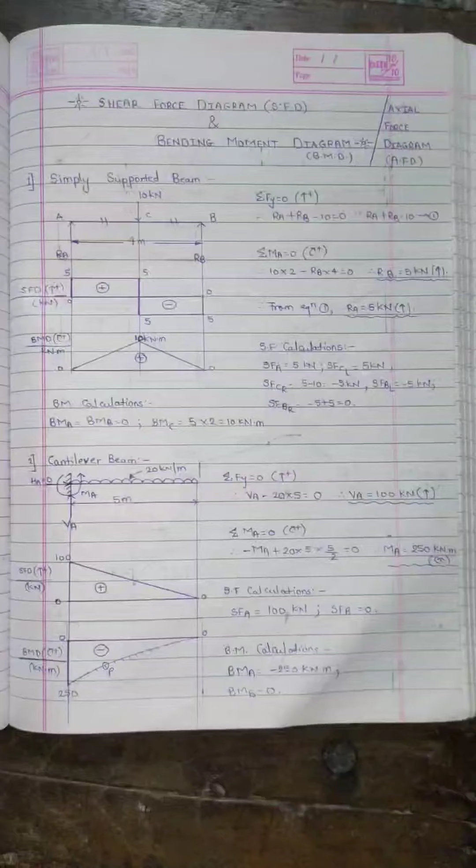In this video we are going to learn about SFD, BMD and AFD, that is shear force diagram, bending moment diagram and axial force diagram. This topic is important for engineering students of branches like civil, mechanical, automobile and related branches, and also for other branches in the first year of engineering.

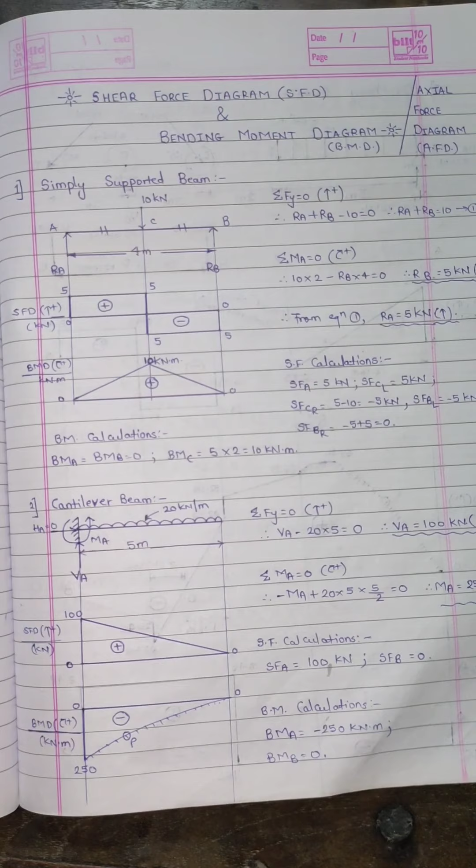This topic starts with dividing it into different types of beams. First is simply supported beam. I have taken a beam of 4 meter span, and at the center exactly 10 kilonewton load downwards is concentrated. This is exactly at the center, so I have mentioned symmetry over here.

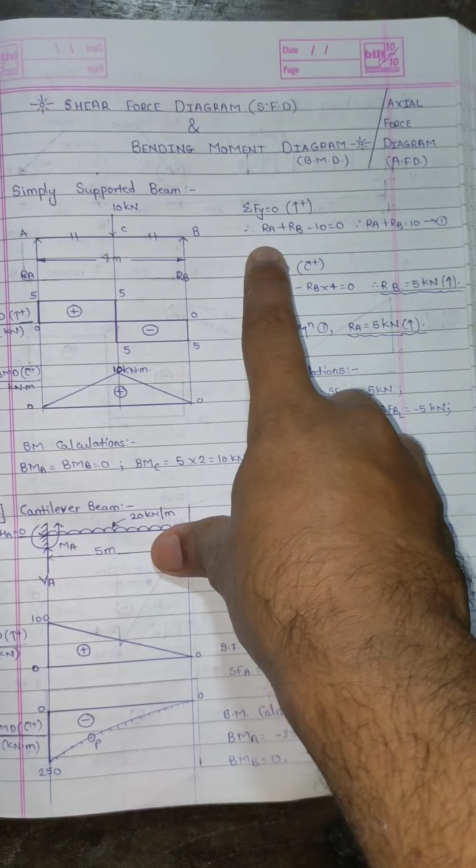Now this point is A and this point is B. First of all we will calculate support reactions, so summation Fy equal to 0. How to calculate support reactions we have also explained in one of our videos, so I'll give that link also, you can go through that.

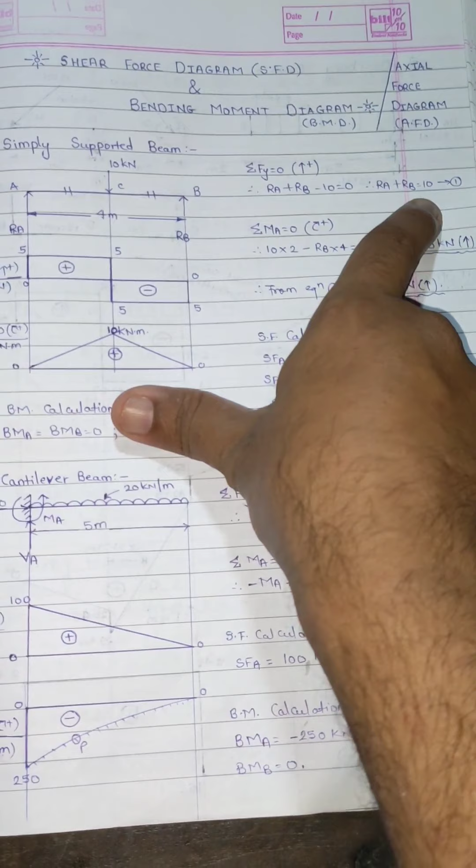Summation Fy equal to 0: Ra upward so positive, Rb upward so positive, and this 10 kilonewton load is downward so we take minus 10. So we get an equation as Ra plus Rb equals to 10, equation number 1.

Now we take our next equilibrium condition, that is summation moment at A equal to 0. This 10 going clockwise, we are taking clockwise positive - one may take clockwise negative and anti-clockwise positive also, but here I am taking convention as clockwise positive.

So summation moment at A equal to 0: 10 going clockwise so positive, and the distance 4 divided by 2, that is 2 meters, so 10 into 2, then this Rb is going anti-clockwise so minus Rb into the distance 4 meters. So I get the answer of Rb as 5 kilonewton. If I put this value in equation number 1, I get value of Ra as 5 kilonewton.

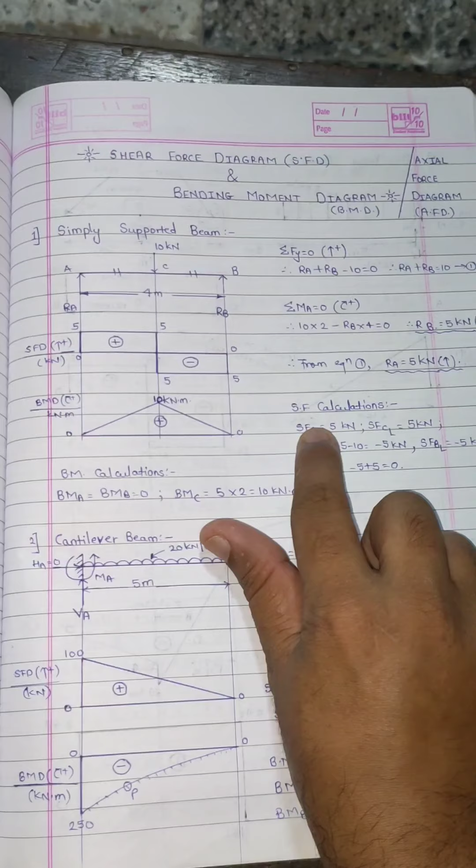Now we have to do shear force calculations. The shear force at A is nothing but Ra, which we received as 5, so I'll draw this vertical line for my shear force diagram. For shear force diagram, going from left to right, we take upward positive, and units are kilonewton since forces are given in kilonewton. So it is 5 over here.

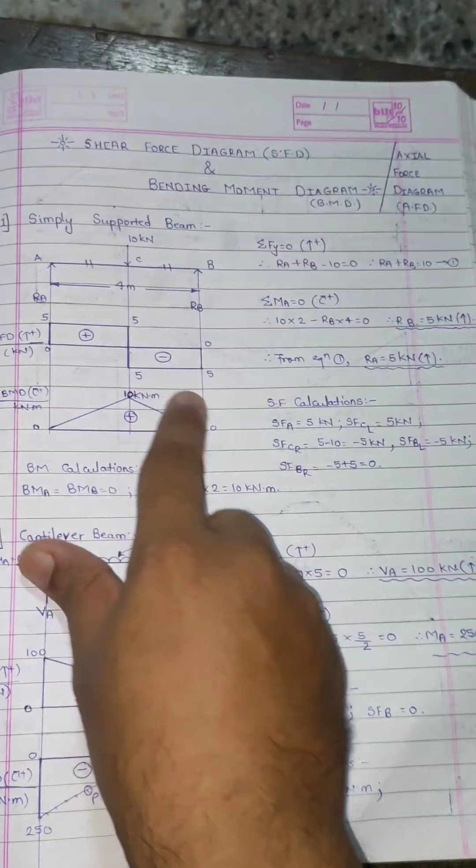Now in between from A, before reaching point C, there is no load, so it is a straight line. As soon as I reach point C, I get this downward load of 10 kilonewton. So shear force at C left is 5 kilonewton, and 5 minus this downward load, that is 10, equals minus 5, so you go down to minus 5.

Now between C, before reaching point B, there is no load, so you draw a straight line at minus 5, and as soon as we reach point B, we get this Rb upward load of 5, so minus 5 plus 5 gives answer as 0. So this is nothing but our shear force diagram.

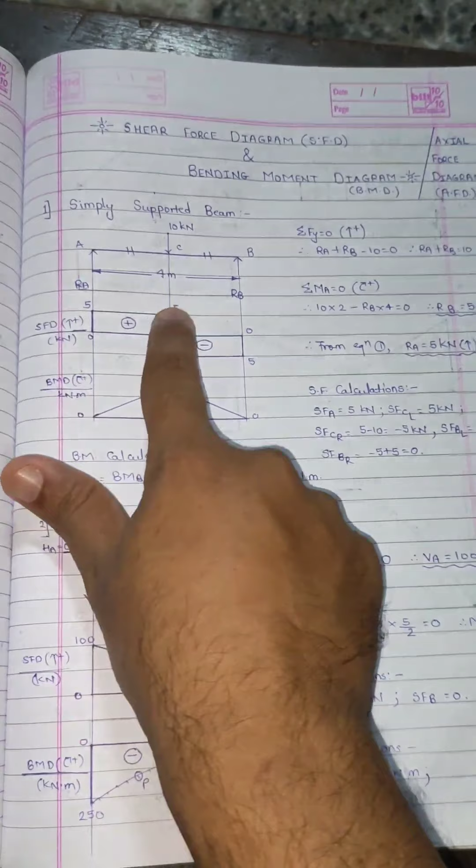Now to draw the bending moment diagram, we have to first do bending moment calculations. Always remember, if it is a simply supported beam, one end hinged and other end roller support, the moments at the ends will always be 0. So bending moment at A equals bending moment at B equals 0, so you draw 0, 0 over here.

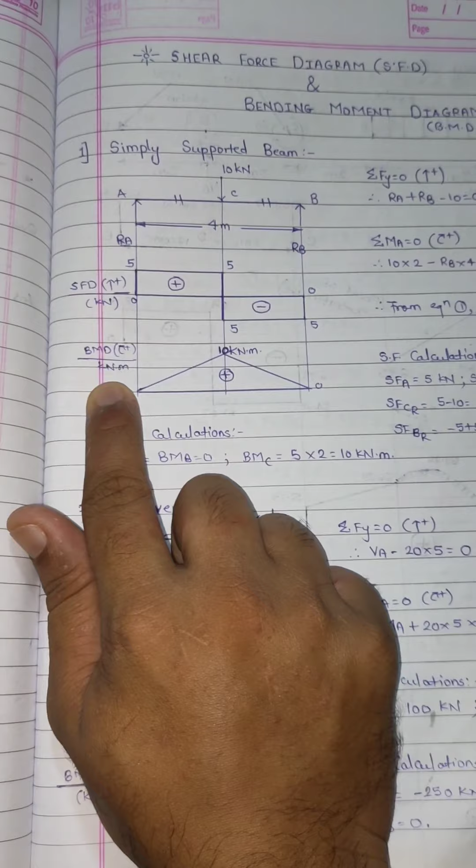Then to find bending moment at C, either I can see from this side or from this side. Whenever I draw my bending moment diagram, I mention clockwise positive, and the unit of moment is kilonewton meters. This force Ra is going clockwise so positive, that is 5 into the distance 2, so 5 into 2, that is 10 kilonewton meter. So I draw an inclined line and connect it here.

So this is what about SFD and BMD of a simply supported beam.

Now, second type of beam we are taking is cantilever beam. I have taken this cantilever beam of span 5 meters, and obviously being cantilever, one end will be fixed, other end will be free. Here I have taken a UDL, that is uniformly distributed load, of 20 kilonewton per meter.

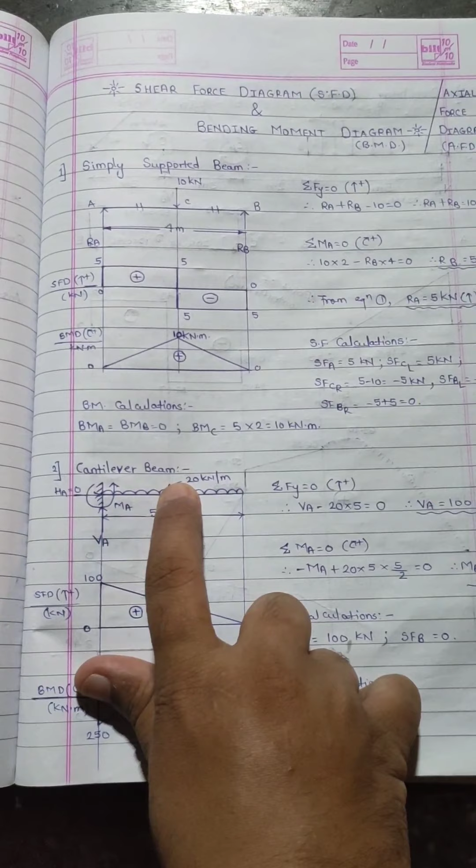Now this point is A and another point we let's say B. At point A, as it is a fixed support, we have to take one unknown moment MA, then unknown shear force vertical VA, and horizontal force HA. But obviously as there is no horizontal load, HA value will be 0.

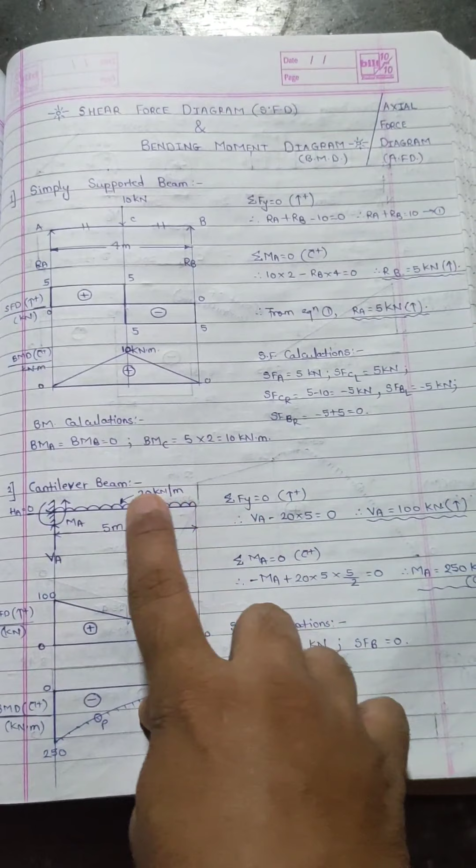Now first of all we will calculate the support reactions, that is summation Fy equal to 0. We take VA upward positive, so plus VA minus 20 (UDL length is 5, intensity is 20), so minus 20 into 5 equal to 0. So we get VA equals to 100 kilonewton, upward arrow.

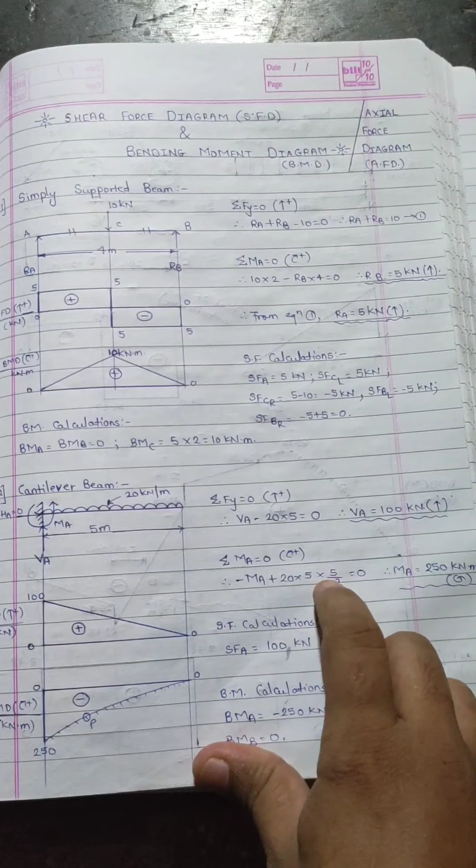Now when we calculate summation moment at A equal to 0, clockwise positive, MA is anti-clockwise, so minus MA, plus 20 into 5 into 5 by 2. This UDL is 20, intensity is 20, so 20 into 5 (length) into length upon 2 -- the concept we explained in our second last video. So into 5 by 2 equal to 0, and the value we get for MA is 250 kilonewton meters, and since it's positive, our assumed direction, anti-clockwise, is correct. So MA is anti-clockwise 250 kilonewton meter.

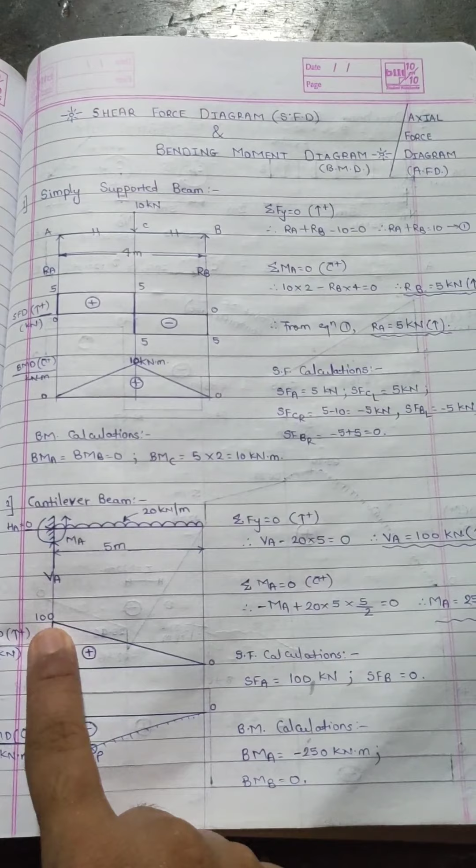Now to draw shear force diagram, first we have to do shear force calculations. Remember, for a cantilever beam at the end support, the shear force will be 0, and when we reach over here, the value of shear force at A is nothing but 100 kilonewton. You have to draw this triangle in the shear force diagram, with upward force positive and unit kilonewton.

Now to draw bending moment diagram, we have to do bending moment calculations first. Remember, at the end of a cantilever beam, moment will always be 0. So bending moment at B we take as 0, and at A we have moment MA, that is bending moment at A, which is 250, but since it's anti-clockwise and we take clockwise positive, the diagram will go downward.

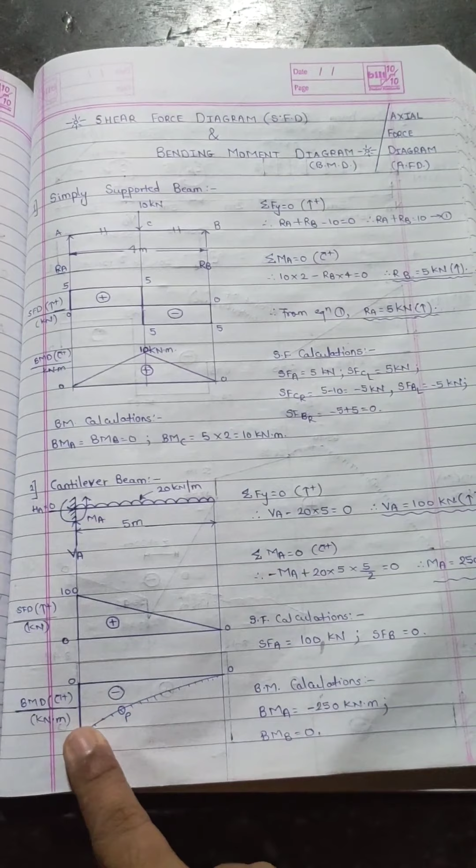Remember, for a bending moment diagram, if there is a UDL, you have to draw the curvature as parabolic in nature. My style of drawing this parabolic shape is to draw a simple curve, draw these lines, and denote P. Some books will just draw a curve and indicate by a line, writing 'parabolic' or 'parabolic curve' or 'parabolic shape'. I just draw these lines and mention P, so the examiner understands this is a parabolic curvature. Okay, now this is all about cantilever beam.

Now our next type of beam is overhang beam.

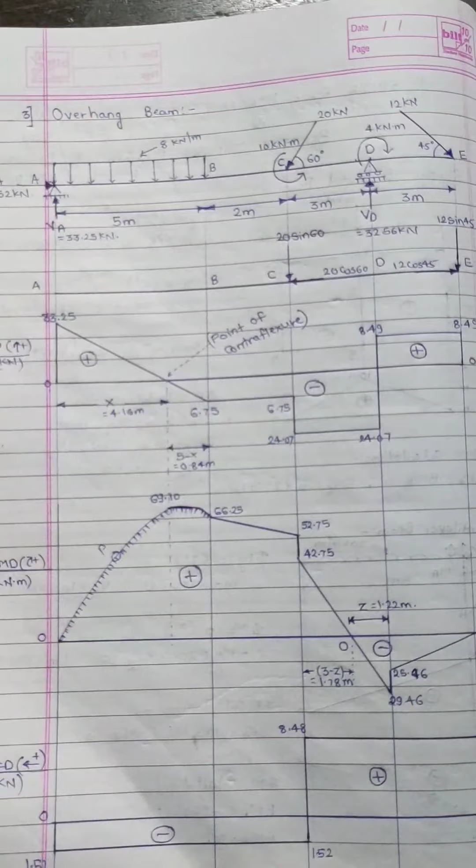I have taken this overhang beam wherein from A to B the length is 5 meters, and I have taken a UDL -- this is also a style of showing UDL -- of 8 kilonewton per meter. Then from B to C there is no load and the length is 2 meters.

At point C we have an anti-clockwise moment of 10 kilonewton meters. Also we have an inclined load, inclined at 60 degrees to the horizontal, of 20 kilonewton. Then from C to D there is no load, but the length is 3 meters.

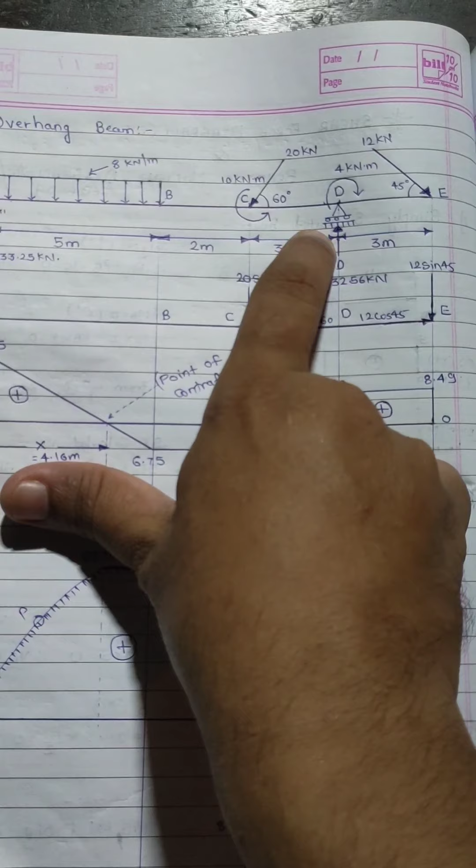At point D there is a roller support, and also a moment in the clockwise direction, intensity 4 kilonewton meters. Then at point E, this is the overhang, the hanging part of the beam. At this point, at 45 degrees to the horizontal, we have a load of 12 kilonewton. So this overall beam length is 5 plus 2 is 7, plus 3 is 10, plus 3 is 13 meters.

So obviously we will have the unknowns as VA, and there will also be HA, because there is an inclined force too. So this is VA, HA unknown -- later on we will find it out -- and also we have VD. So let's start with the calculations. To do calculations, first of all, I'll just put my mobile like this.

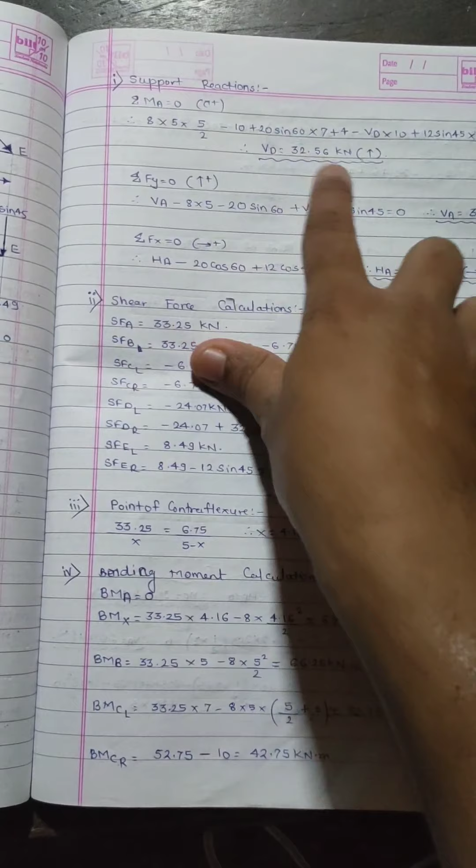Okay, so what we will do, we'll first take summation moment at A equal to zero. We have this UDL, intensity 8 kilonewton per meter, so 8 into the length is 5 into 5 by 2, that's what we have written.

Then this moment of 10 kilonewton meters going anti-clockwise, so we'll write minus 10. Then this inclined load, we have resolved as vertical 20 sine 60 and horizontal 20 cos 60. Also this load again, 12 vertical sine 45 and horizontal 12 cos 45.

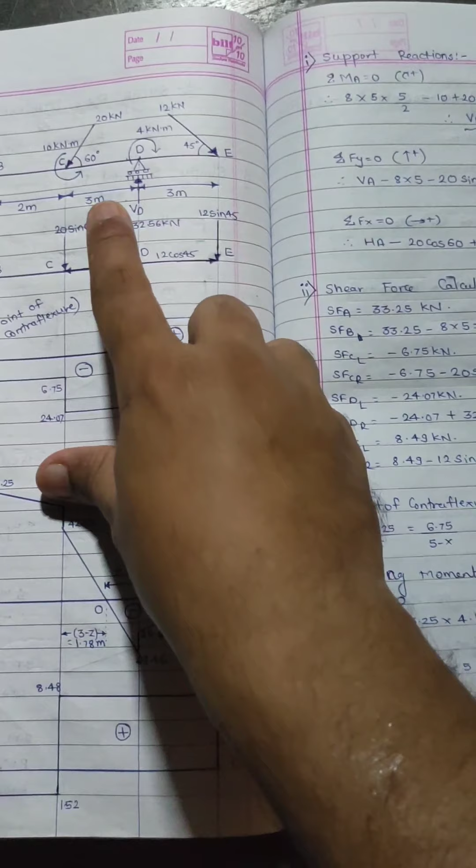So this vertical will be 20 sine 60, and since it's going clockwise, it's positive, and the length is 5 plus 2, that is 7 meters. So 20 sine 60 into 7, that is what we have. Then the next is this clockwise moment, 4 kilonewton meter, and for a moment there's no need of writing length, so plus 4 as it is going clockwise.

Then this VD going anti-clockwise, so minus VD into the length, 5 plus 2, 7 plus 3, 10. So minus VD into 10, plus this 12 sine 45 again going clockwise, total length 13 meters, so plus 12 sine 45 into 13 equals to zero.

From this equation we will get VD equals to 32.56 kilonewton.

Next is summation Fy equal to zero. We have to take upward positive, mentioning all vertical loads. First VA, since it is upward, so plus VA. Then we have this downward UDL, minus 8 into 5. Then we have this 20 sine 60, minus, since it is downward. Then this VD upward, so plus VD.

Then this 12 sine 45 is downward, so minus 12 sine 45. There is no other load present, so no moment to take in vertical loads. So VA we will get as 33.25 kilonewton.

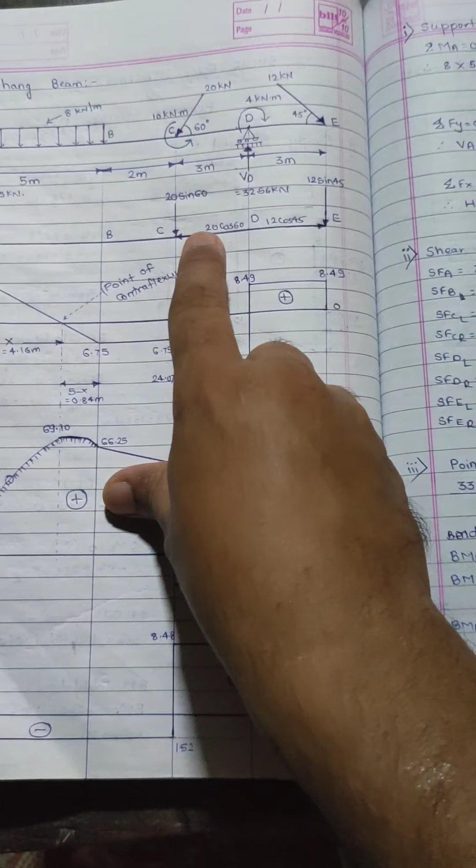Upward arrow. Then to find Fx, there is a horizontal load present at support A because there are two inclined loads. The notation we are taking is right positive. HA already assumed as right, so plus HA. Then this is going left side, minus 20 cos 60, and this is going right, plus 12 cos 45. When we do calculations, you will get HA equals to 1.52 kilonewton.

Now first we have to do shear force calculations, so draw shear force diagram. We have mentioned, going left to right you take upward positive and downward negative. If going right to left, it is exactly vice versa, upward negative and downward positive, but normally we will follow this convention.

First let's see the shear force at A. This is nothing but VA, that is 33.25, so we draw a straight line of 33.25. From A to B there is a UDL, so this line will be inclined, and the value we calculate as 33.25 minus 8 into 5, since it's UDL, giving minus 6.75, and since it's minus, we draw it downwards.

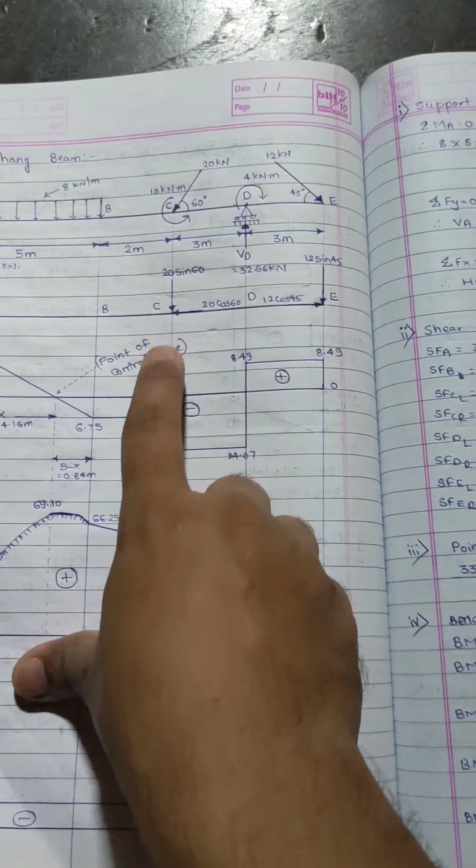Now from B to C there is no load, so we just draw a straight line. As soon as we reach point C, there is a downward load of 20 sine 60. So C left, same load you copy, and at C there is no load until you reach the point, so at point C right, minus 20 sine 60, you'll get answer as minus 24.07.

Now from C to D there is no load, so we draw a straight line, that is D left. As soon as you reach point D, there is a vertical load, VD, whatever the value of VD, that we have to add or subtract.

So minus 24.07, it is at D left point, and at D right point the value of VD we will add, and we will get D right shear force. Then again at E left, same value, that is 8.49 what we have received. We will just draw a straight line as there is no load in between, and as soon as we reach this point, we will subtract, not add, because it is downward. That is 12 sin 45, and we will get answer equal to 0.

Now when you draw this shear force diagram, you see there is a change from positive to negative, there is a change in curvature of the shear force diagram. This point is called the point of contraflexion, or point of inflection, or point of zero shear. Many times the bending moment over here will be maximum, except in some cases.

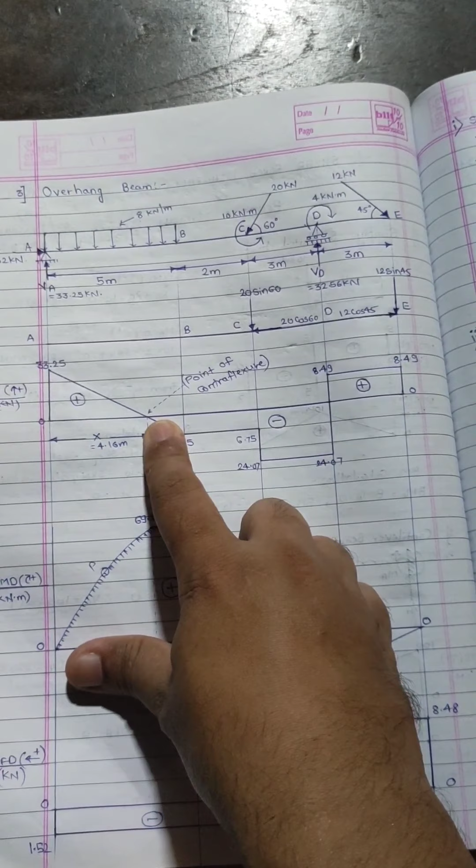So we have to first find out this distance x. To find out this distance x, we have to use the similarity of triangle properties which one studies in school life, that is height upon base equal to height upon base. So height of first triangle is 33.25, and let's assume this length as x. So 33.25 upon x equal to, this height is 6.75, so 6.75 upon, if total is 5 and this is x, obviously this will be 5 minus x, so upon 5 minus x, and we will get answer x is equal to 4.16, which we can solve on a calculator.

Now we have to draw a bending moment diagram. To do this, first we have to do bending moment calculations. At A and E, both points, the moment will be 0.

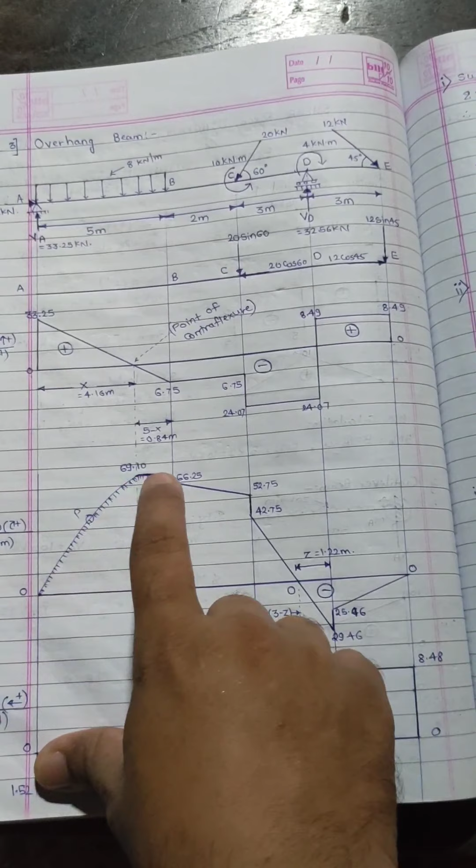Now from here to here, at that point x, at moment A, bending moment at A equal to 0, then at x what is the value? So this 33.25, that is VA, into the distance. What is the distance? We have found out 4.16. We are finding at this point, so 4.16. Then is there any other load? Yes, there is a UDL, that is 8. So minus 8 into 4.16 square upon 2, the formula here is WL square by 2, because it is a UDL. So we will get value as 69.1 kilonewton meters.

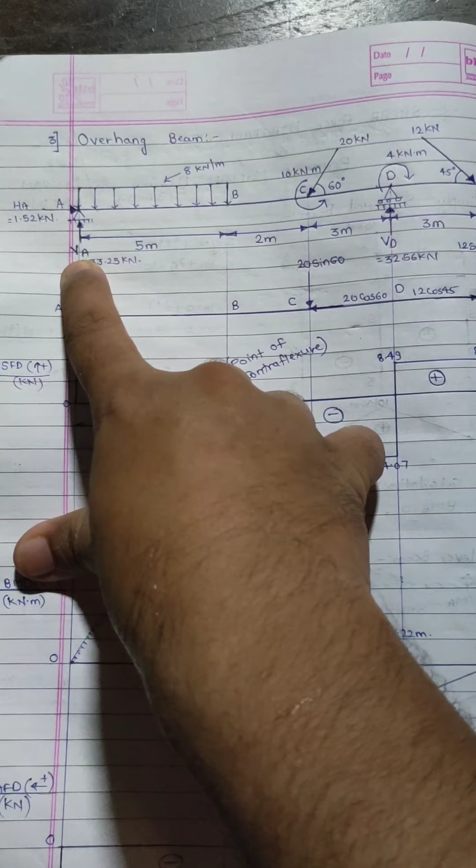So this bending moment at B we have to calculate. For bending moment at B, what we will do? Again you have to start from the starting point. So VA, that is 33.25 into 5 minus 8 into 5 square upon 2, because of the UDL, so the answer we will get as 66.25 kilonewton meters. Again I am mentioning that how to calculate support reactions of UDL, UVL, point load, everything we have explained in our video, and the link of that video I will give in the description.

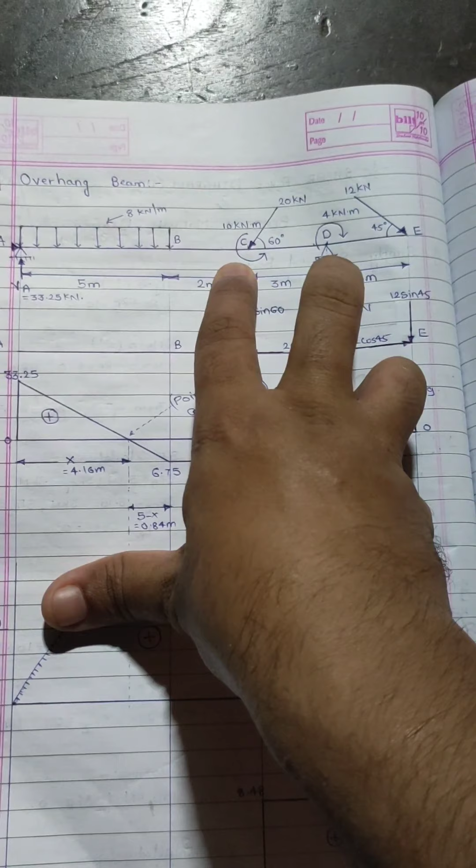Now we have to calculate bending moment at C left point, because when you do shear force diagram and bending moment diagram, whenever there is a change in force, you have to find out shear force at left and right side both for SFD, and whenever there is a moment present, now in this case there are two moments present at C and D, so you have to find out bending moment at C left, C right, and then D left, D right also. So about C left we will find out first.

So 33.25, that is this force, into the length is 7, then this UDL, that is minus 8 into 5. This UDL is not up to point C, so we will divide this length 5 upon 2 and add this 2. So that is what we have written: minus 8 into 5 into 5 by 2 plus 2, and then the answer will be 52.75 kilonewton meters. And when we cross this point, we come across this moment anticlockwise minus 10, so we will subtract this 10 from here and we will get value as 42.75 kilonewton meters.

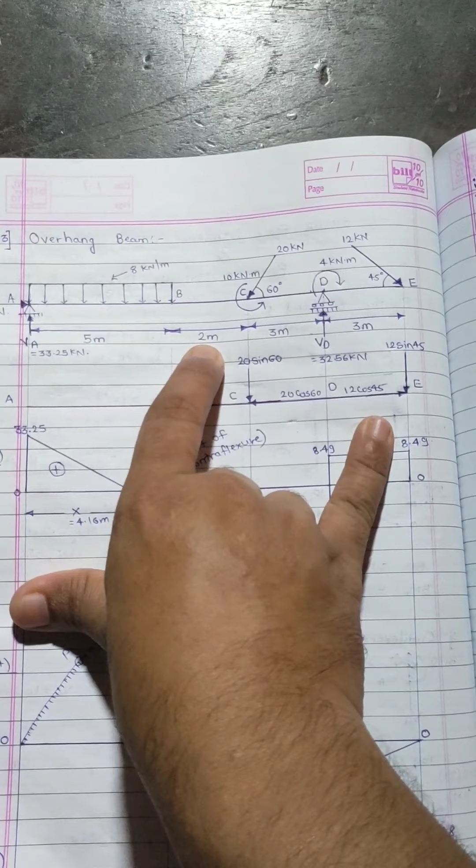Now next we have to find out bending moment at point D left. So it will be VA into this length, that is 5 into 2 into 3, 5 plus 2 plus 3, that is 5 plus 2 is 7 plus 3 is 10, so 33.25 into 10.

Okay, this is 33.25 into 10, then see this UDL - same concept will apply, minus 8 into 5 into 5 by 2 for this UDL's length, and then 2 plus 3, 5. So 5 by 2 plus 5, that is what we will get.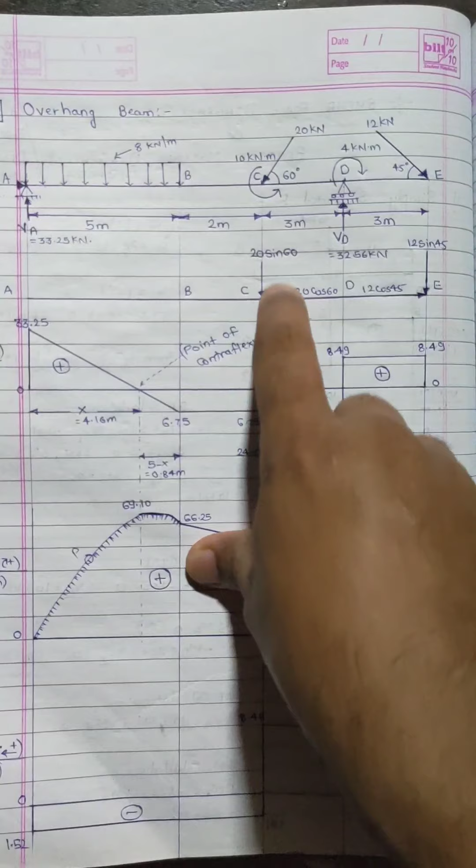Then this anti-clockwise moment, so minus 10, that is what we have written. Now this load, that is minus 20, as 20 sin 60 is downward anti-clockwise, so minus 20 sin 60 into the length, this is 3 meters. So into 3, and we get the answer as minus 29.46 kilonewton meters.

Now when we cross this point D, we come across this moment clockwise 4, so we will add it, plus 4, and we get the answer as minus 25.46. And at point E, the end point, the moment is 0. This is how we plot this bending moment diagram using the values we have received.

From A to B this is a parabolic curve in nature because this is a UDL. So we will show these lines and show P as said earlier. This is my bending moment diagram, clockwise positive in kilonewton meters, and earlier we drew the shear force diagram, upward positive in kilonewtons.

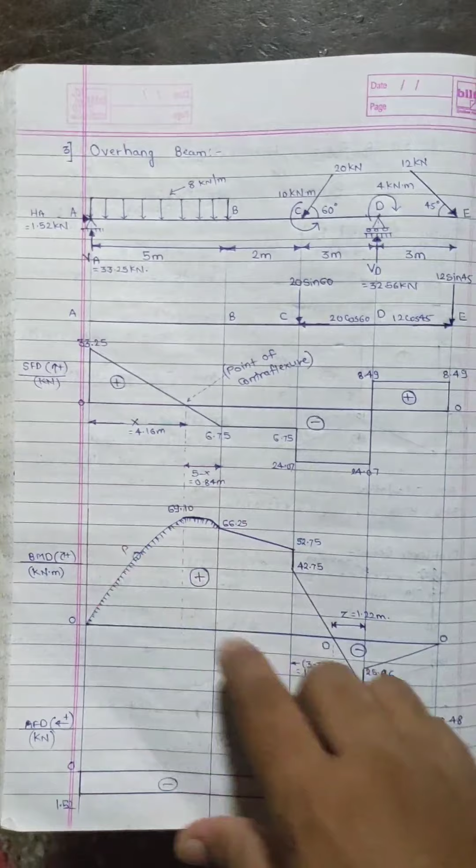Now last thing remaining is the axial force diagram. Before drawing it, note that just as in the shear force diagram, the bending moment diagram also gives us the point of contraflexure - the same point of contraflexure we have got here also.

Earlier we gave this length as x, so let's say this length is z, and the total was 3. See here it is 3, so we will say this is 3 minus z.

Again using the similarity of triangles, that is 42.75 upon 3 minus z equal to 29.46 upon z, so 29.46 upon z equal to 42.75 upon 3 minus z. Solving this equation, the value of z comes out as 1.22 meters.

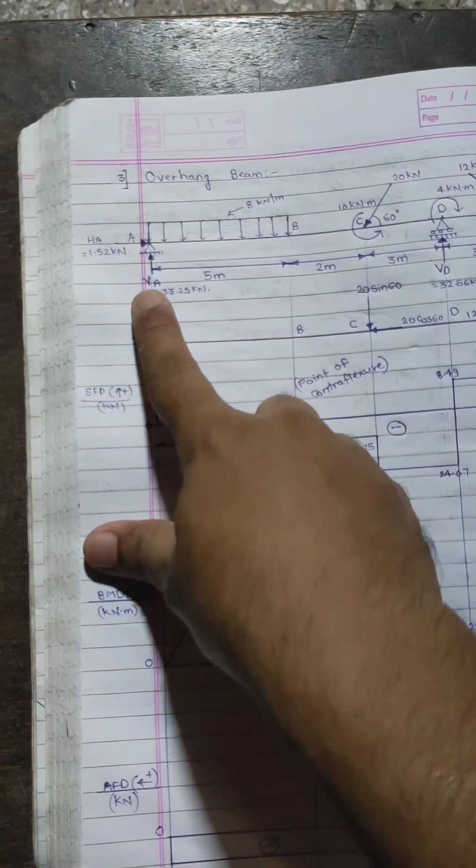Now to do axial force calculations, we are taking left positive and right negative, that is tension positive and compression negative. So at point A, since this is right side, 1.52 is negative, so we'll draw negative 1.52.

Now from A up to point C there is no horizontal load, so we draw a straight line. As soon as we reach point C, we have this 20 cos 60 load, so we add it - minus 1.52 plus 20 cos 60 gives plus 8.48 kilonewton. So we draw from minus 1.52 to plus 8.48.

From here till end point E we don't have any horizontal load, so we draw a straight line. As soon as we reach point E, we get this 12 cos 45 load on the right side. For this right side load we have to subtract it, so we get 8.48 minus 12 cos 45.

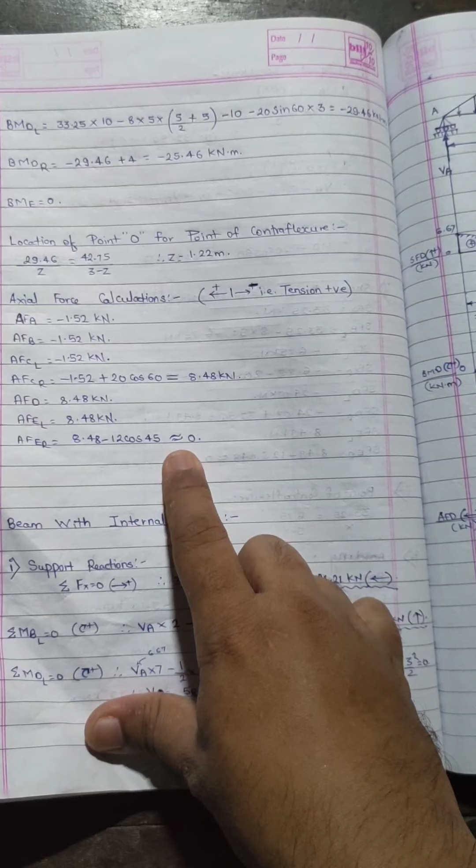Approximately you will get a value like 0 point some digits, but it will be approximately 0 - or on your calculator you may get 1 point something or 2 point something into 10 raised to minus 3, which is approximately 0. That's because we are not doing exact calculation and miss some digits. If you take exact digits you will get approximately 0 as the answer. So the value is 0.

So we will draw this line downwards, and this is about the overhang beam's shear force diagram, bending moment diagram, and axial force diagram, along with the calculations.

Okay, now our next type of question is a beam with internal hinges. Let's see the question.

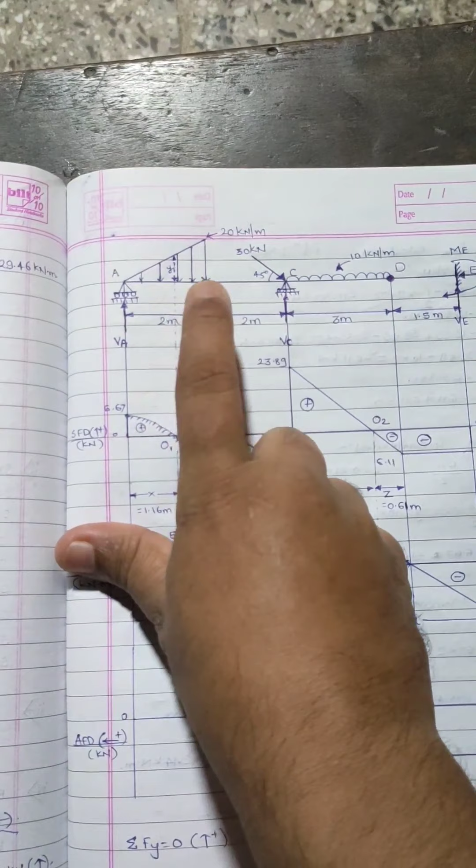This is the type of beam I have taken, where from A to B there is a UVL of intensity 20 kilonewton per meter, with length 2 meters. From B to C there is no load, length 2 meters. At point C we have a roller support - here also there was a roller support, I did not mention that at point A. Then at point C we have a 30 kilonewton load inclined at 45 degrees with the horizontal.

Then from C to D the length is 3 meters and we have a UDL of 10 kilonewton per meter. At point D this is the internal hinge, and also point B was an internal hinge. Then from D to E the length is 1.5 meters. At point E we have a fixed support, so the unknowns will be HE, the horizontal load, VE, the vertical load, and moment ME.

Now this inclined load I have resolved directly over here, that is 30 kilonewtons. I have resolved it as 30 cos 45 and 30 sin 45. This sign indicates there is a continuation, so this part only I have drawn over here. Okay, let's just have a look at this.

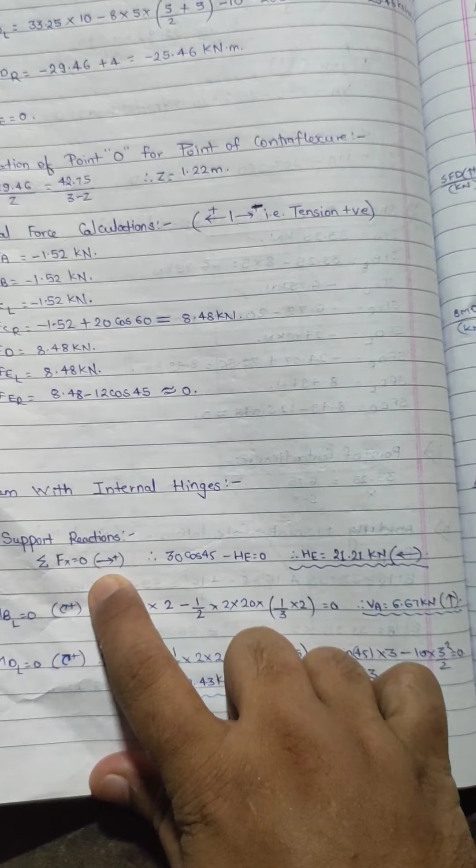Now first of all we will calculate the support reactions. So to calculate support reaction we will take summation Fx equal to 0, that is horizontal loads, right positive. So the first right positive load I have is 30 cos 45, minus HE, because this I have taken on the left side, equal to 0, and I get my value of HE as 21.21 kilonewton, left arrow. Whatever I have assumed, my direction is correct.

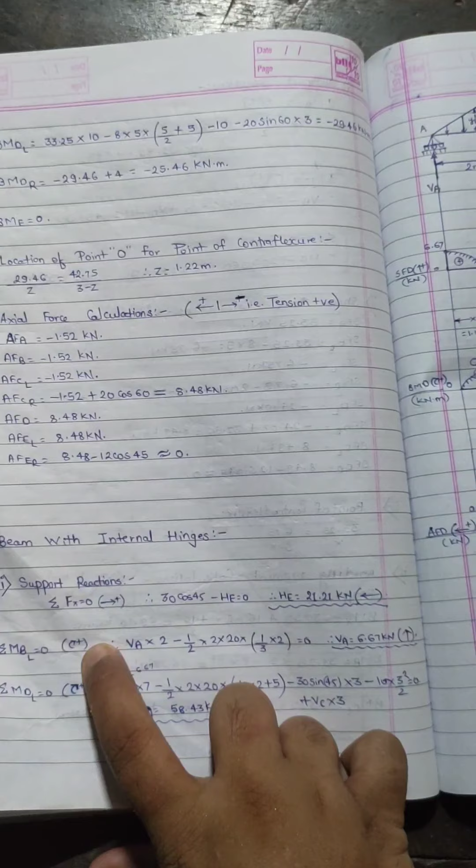Now second equilibrium condition, I'll take summation moment at B left equal to 0, clockwise positive. I'll take the left part of the beam up to point B. So what all loads we have is, first of all VA, so VA into 2, then we have a UVL, so half into base into height, half into base is 2, height is 20, and as explained in the video on load calculations, from the right angle the length is 1/3. So from here it is 1/3; if calculated from there it would be 2/3. So 1/3 into the length 2. I will get my value of VA.

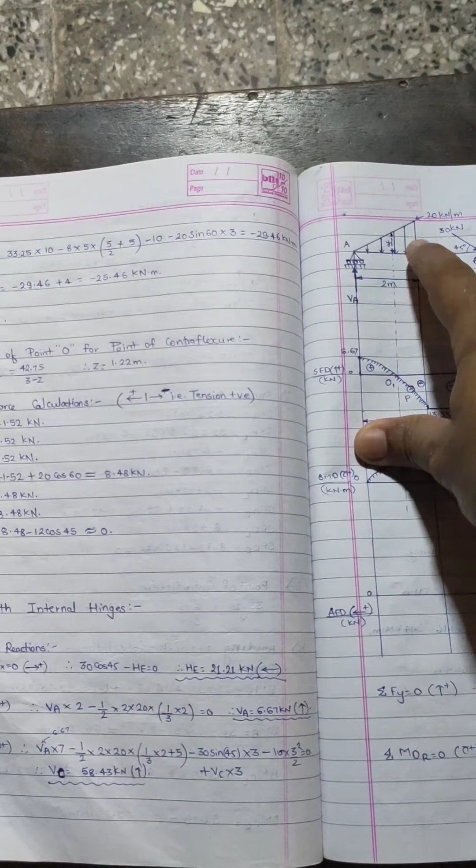Then summation moment at D left equal to 0. Up to D, whatever loads I have, I take those. First of all is VA, so VA into 7 (2 plus 2, 4 plus 3, 7). Then I have the UVL, so half into 2 into 20, then 1/3 of 2 for A to B, and from B to D the length is 2 plus 3, 5 meters, so plus 5. Then I have this downward load as resolved, minus 30 sin 45 into the length 3 meters, so into 3. Then for this UDL it is minus 10 into 3 into 3 by 2, equal to 0. One more load we have, VC, going clockwise, so VC into 3, equal to 0. So we will get our value of VC as 58.43 kilonewtons.

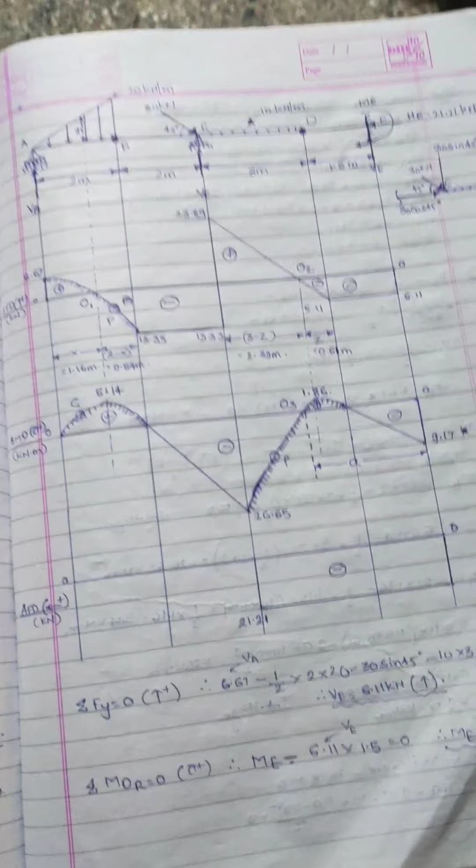Okay, so by solving this we get the value of VC as 58.43 kilonewton, upward arrow. Now our next equilibrium condition is summation Fy equal to 0, upward positive. We take all the upward and downward loads. First we have VA, that is 6.67. Then we have the UVL, but it is downward, so half into 2 into 20 with minus sign. Then we have 30 sin 45, again minus. Then we have this UDL minus 10 into 3, downward, so minus. Plus VE we have, then VC, value 58.43, we also have. Equal to 0, and we get value of VE as 6.11 kilonewtons.

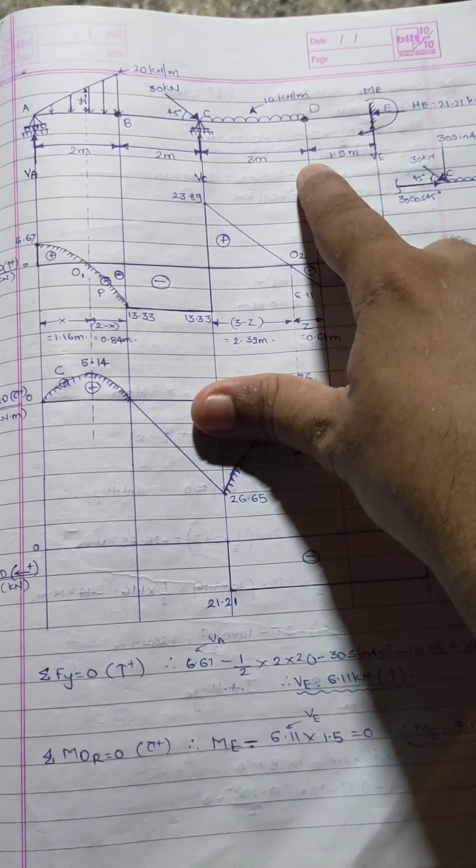Now one more condition we have to do, that is summation moment at D right equal to 0. Whatever is on the right hand side of D, we take that moment as 0. So first we have ME, as it goes clockwise, so ME positive, then minus 6.11 for this VE, as it goes anti-clockwise, so minus 6.11 into distance 1.5 equal to 0. So we get value of ME as 9.17 kilonewton meters, with the clockwise arrow, whatever we assumed is correct.

Okay, now next part is to do shear force calculations. At point A, the shear force is VA, value 6.67, so we'll draw a vertical line. So at point A the value is 6.67. Now next is point B. At point B the value will be VA, that is 6.67 what we had, and then minus this UVL, that is half into base into height, half into 2 into 20.

So, 6.67 minus half into 2 into 20, you will get minus 13.33. Now before reaching point C, we don't have any load in between, so at C the left value will be the same as what we had.

As soon as we reach point C, we get this 30 sine 45 load, and since it acts downward, it is minus 30 sine 45. So C left value is the same, minus 13.33, and then it becomes minus 13.33 plus 58.43 minus 30 sine 45. That's because there are two loads, VC and 30 sine 45, and we get this value as 23.89 kilonewton.

Now at point D we have to calculate, which is subtracting this UDL, that is minus 10 into 3, and the value would then be minus 6.11.

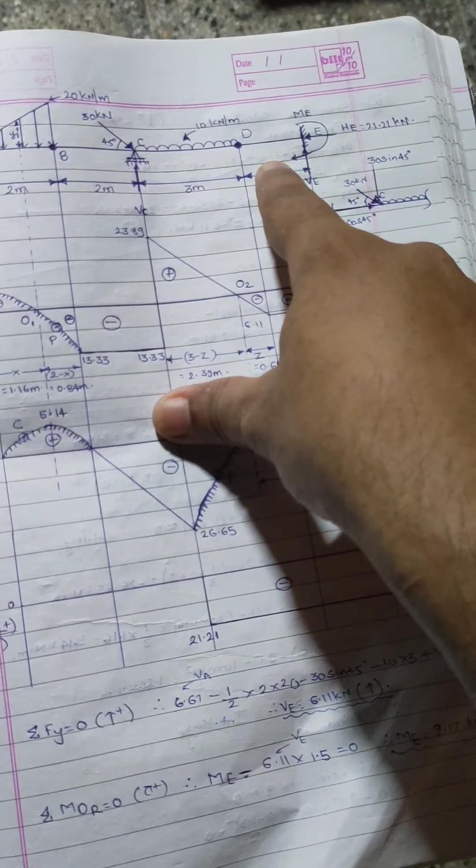Then up to before we reach point E, there's the same load, so we just copy the same value. As soon as we reach point E, we are getting VE, so we have to add that VE. Earlier it was minus 6.11, we copy it and add plus 6.11 for VE, and we get a value equal to 0.

Now in this shear force diagram again we are getting a point of contraflexure, but here there is no triangle, this is a parabolic curvature. So there is another method to find it out, and at this point there is a triangle, so we can do this by similarity of triangles.

This length we have assumed as x, total is 2, so this will be 2 minus x. Similarly this we have assumed as z, total is 3, so this will be 3 minus z, and we have given names as O1, O2.

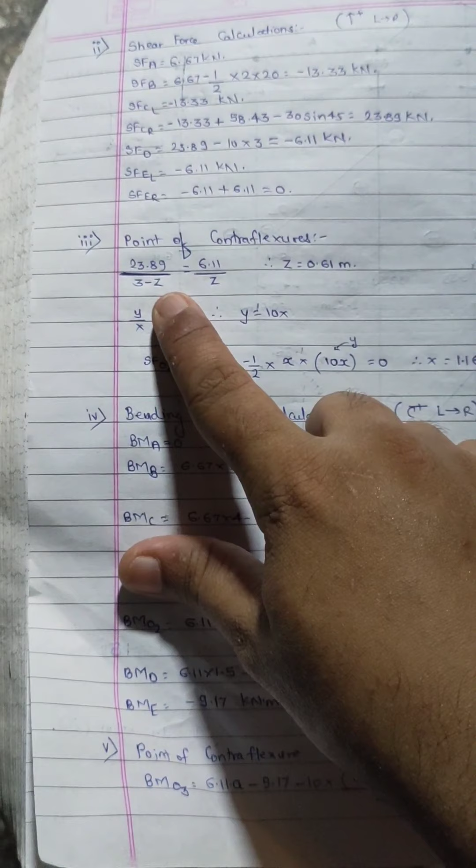First of all we have to draw this shear force diagram so that we get these points of contraflexure. Now we'll find out these two points of contraflexure. The second one we can do simply by similarity of triangles, and the value we get is 0.61.

For the first one, we will consider this length, let's say this length is y, so we will first calculate what y is in terms of x. By similarity of triangles, height by base, that is 20 by 2 equal to y by x. So 20 by 2 is y by x, and we will get y value as 10x.

Now we'll find out the shear force at point O1, which is 6.67, that is VA, minus half into base, which we assumed as x, and the height was y, which we found as 10x. We equate it to 0, and we get the value of x as 1.16 meters.

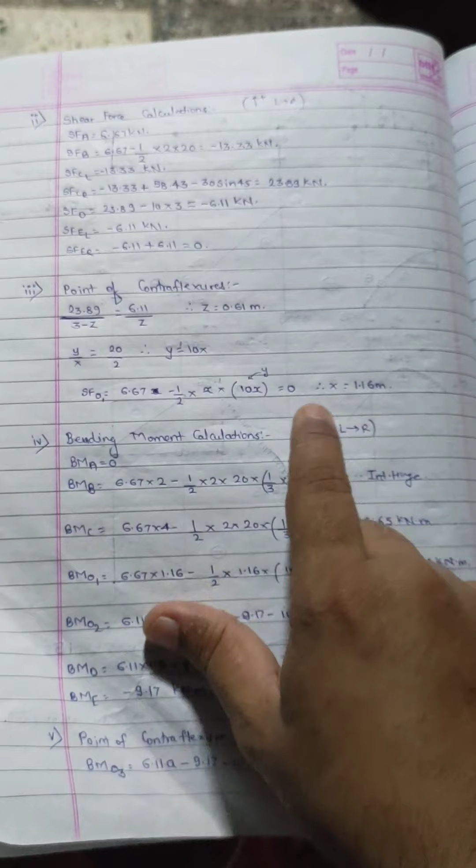Now the thing which remains is bending moment calculation and axial force calculations. So first of all let's do the bending moment calculation.

Since point A is a hinge support, the moment at A will be 0. Now at point B, we have taken clockwise moments as positive from left to right.

Now at point B, let's see what all things we have. First of all we have this VA into 2, whatever the value of VA we will put, and we have this UVL, that is half into base into height into the distance. As I said earlier, the distance will be 1/3 of 2, so 6.67, that is VA into 2, minus half into 2 into 20 into 1/3 of 2, approximately we will get the value as 0.

You don't even have to calculate this value because B is an internal hinge.

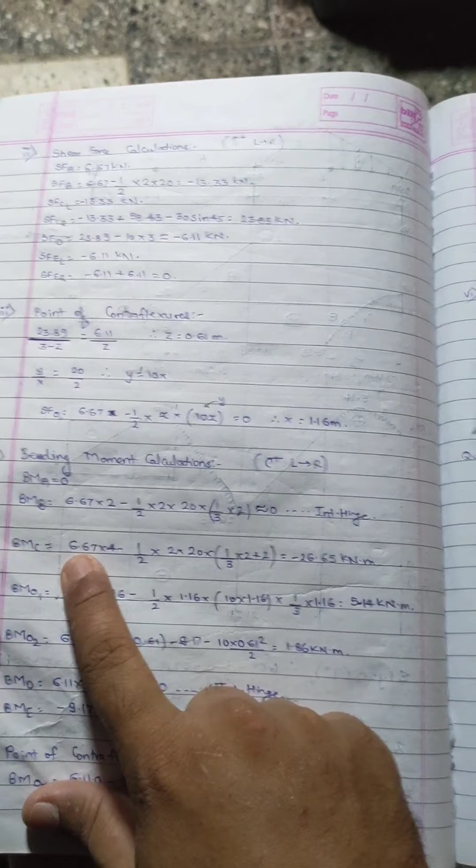Now at point C, again it is the same: VA into this 4, then half into base into height for this triangle, that is half into 2 into 20 into 1/3 of 2, and we add this 2 meter length. Is there anything else we have? No, right? So we will find out this value.

6.67 into 4, that is VA into 4, minus half into 2 into 20 into 1/3 of 2, and adding that 2 meters, we get this value as minus 26.65 kilonewton meters. Now for O1 and O2 also we have to find out the moments.

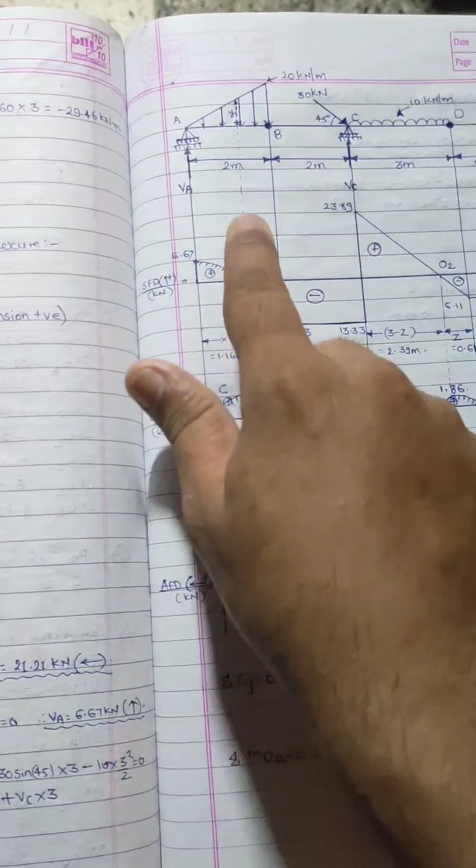O1 and O2, the length of x and z we have found out, same, 6.67 into 1.16, that is our length of x. Up to this moment we calculate VA into this length, then half into base into height into this particular length, that is 1/3 of 1.16. So 6.67 into 1.16 minus half into 1.16 into 10 into 1.16, that is for y.

Earlier, this half into 2 into 20 we have done, but here, in the previous moment we had this total UVL, so the total height was 20, but for this we have just this much span. So particularly we have to find out this y value we found out earlier, that is 10x.

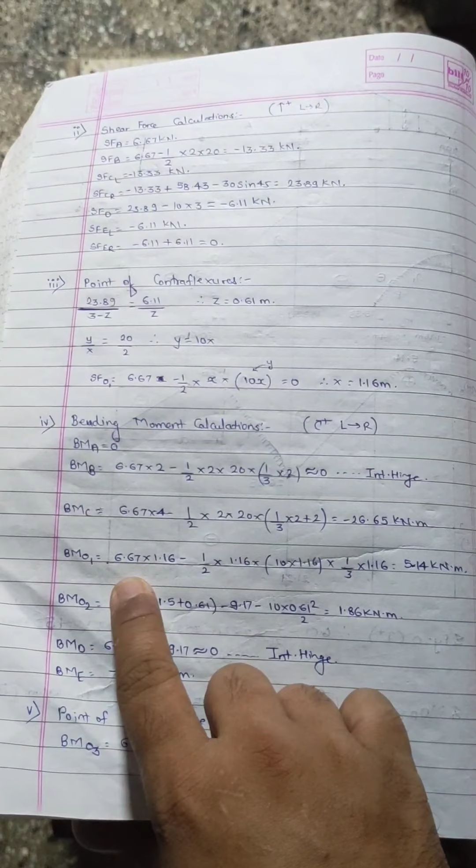So 10 into 1.16 into 1/3 of 1.16, the value we get is 6.67 into 1.16 minus half into 1.16 into 10 into 1.16 into 1/3 of 1.16, which gives 5.14 kilonewton meters. Now for point O2, let's calculate from the right hand side.

It will be easier to find it out from the right hand side. If you calculate from left hand side also, it will be the same value. So 6.11 is the value of VE.

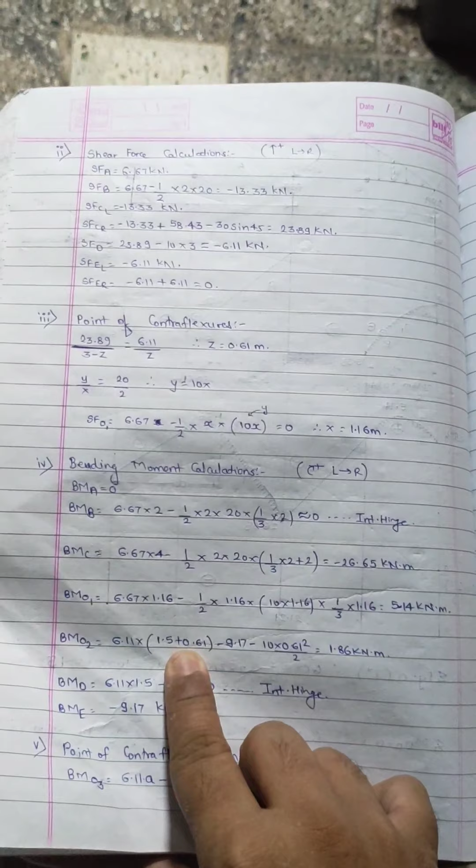Into this distance we take 1.5 plus 0.61, then we have this moment of ME, whatever value that is, we add, and that's it, that's two loads we have. So 6.11 into 1.5 plus 0.61 minus 9.17, that is for ME.

And then we have for UDL, minus 10 into 0.61 square upon 2. We have this smaller span, and in this smaller span there is this UDL, so it is minus 10 into 0.61 square upon 2, and the value we get is 1.86 kilonewton meters.

Now similarly, when we calculate the bending moment at point D, it will again be 6.11, that is VE into 1.5, minus 9.17, that is the moment of ME, and we get a value of approximately 0. Even this you don't have to calculate because D is the internal hinge.

And at point E, the bending moment at E, we get as minus 9.17 because it is the value of moment ME, and because it is clockwise and we are going from right to left, it will take us minus 9.17 kilonewton meters.

Now in between, if you see in this particular BMD, we have got this point of contraflexion, which we have denoted as O3. So we have to just find out the exact length that we have got.

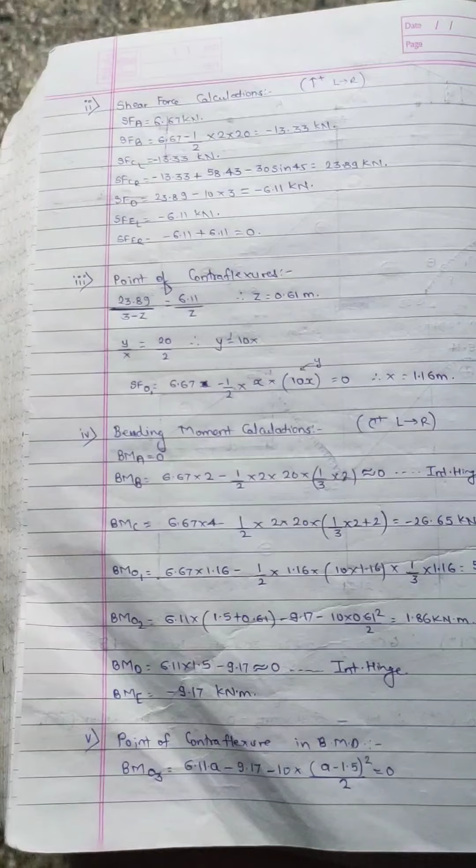So now what we will do is we have assumed this length as A. This length we have assumed as A, so VE into A we will do. Then we have this moment, so that we add up, and one more thing we have is this UDL, so those things we will add.

So we get 6.11 into A, that is for VE, then we have this moment minus 9.17, then we have UDL minus 10 into the length. We want just this length, total is A, this length is 1.5, so this much length will be A minus 1.5 square upon 2 for UDL.

So the final answer, we have to just equate it to 0, and thereafter, when you solve this equation you get two values of A, out of which one will be valid because A cannot be 1.5, so you get A equal to 2.72 meters.

Okay, after that what we have to do is axial force calculations. We are taking left horizontal load as positive, and right horizontal load as negative when we are going from left to right.

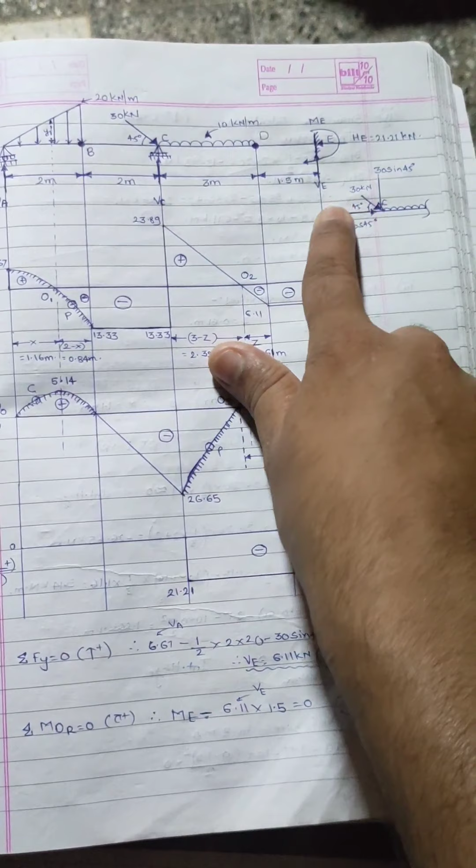So now let's see the diagram. From A till C there is no load, so at all these points it will be 0. Once you reach point C, we have this inclined load for which we resolved it, 30 cos 45, the value is 21.21, and because it's right, we take it as minus. From here to here there is no load again, so we'll draw a straight line.

It is again 21.21 over here, I have not mentioned here. Then when we get this 21.21 value at HE again, we add it up and get value as 0. See the calculations, first have a look at the whole diagram. This is my beam, this is my shear force diagram, this is my bending moment diagram, and this is my axial force diagram. So these are my calculations from A to B, the moments, the value of axial force was 0. At C, the value was minus 30 cos 45, that is minus 21.21. Again at D and E left also it was the same, and for E right we just added the value of HE and we get value equals to 0. This is all about our beam with internal hinge.

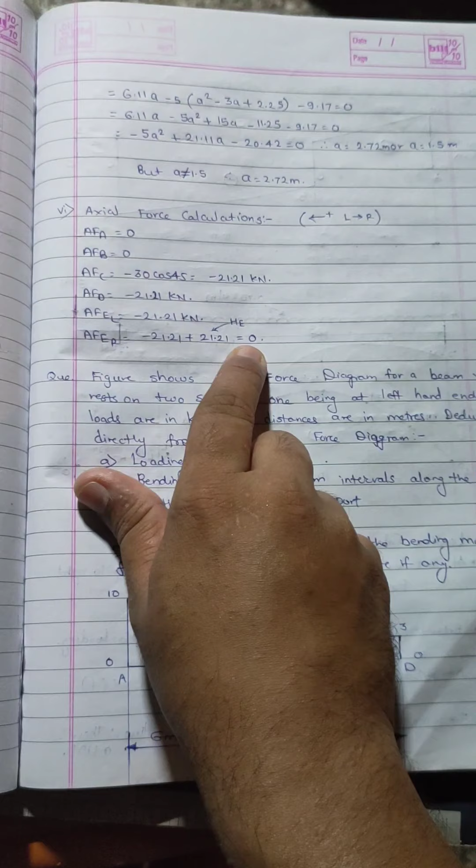Now the question says the figure shows a shear force diagram for a beam which rests on two supports, one being at the left hand end, and the loads are in kilonewton and distances are in meters. Deduce directly from the shear force diagram. So in this question they have given you the shear force diagram already, and what you have to find out is the loading on the beam, bending moments at 2 meter intervals along the beam, then the position of the second support, then the bending moment diagram, indicate the maximum value of the bending moment, that is BM max, and indicate the point of contraflexure if any.

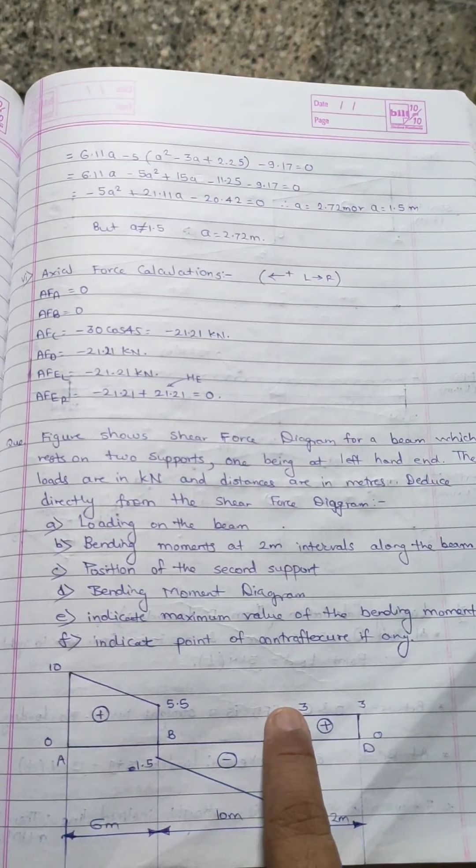And this is the kind of diagram they have provided to you. See, A, B, C, D: 10, 5.5, minus 1.5, minus 9, 3, 3, 0. Here also it is 0. The length is 6 meter, 10 meter and 2 meter. So now let's see the solution of the question, what exactly you have to do. I have redrawn this diagram again over here, and let's see the solution. First step is loading calculation.

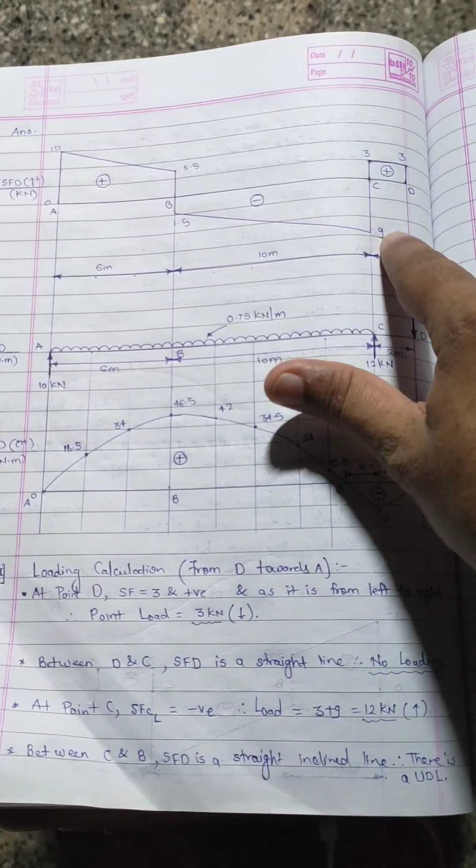So from D towards A, if we go, shear force is 3 and it is positive. So what we can see, it is from left to right, so the point load will be downward, as it is positive, so the point load will be downward, that is 3, we will draw over here. Now at point C, the load is from 3 to 9, so it is exactly changing, so you have to add those, that is 3 plus 9, it is 12. As it is negative, from right to left if you go, negative is upward, so that is 12 kilonewton upward load you have to draw over here.

Then between C and B, if you see, the SFD is a straight inclined line, so there is a possibility of a UDL. Now the value of that UDL: you have to subtract those two values, 9 and 1.5. So 9 and 1.5, when you subtract, you get 7.5, and the length is 10 meters, so 7.5 upon 10 gives a value of 0.75 kilonewton per meter. The slope is positive, so the UDL will act downward, so we draw a downward UDL, this is the kind of UDL we get.

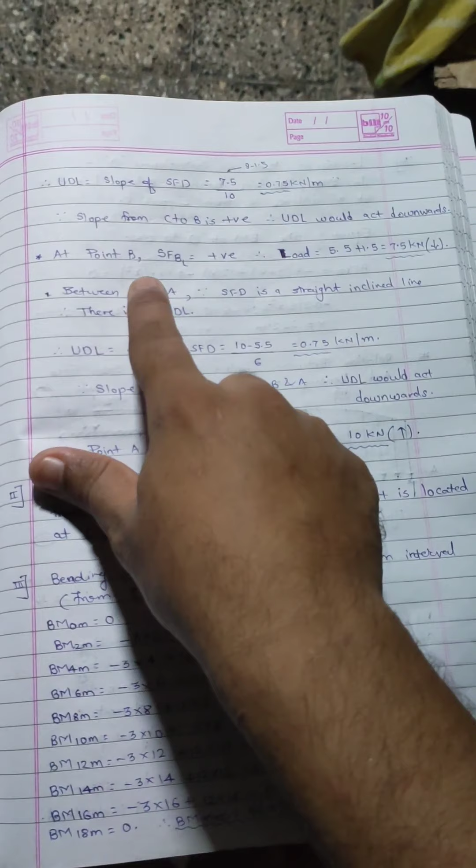Now at point B, shear force at B left is positive. The load will be, we add those two loads which are 5.5 and 1.5, so the value we get will be 7.5 kilonewton downwards, that is what we will draw over here. Next, between B and A, the SFD is a straight inclined line, so there is a UDL, and again the same way we find it out, we subtract those two, and the length was 6 meters, so 10 minus 5.5 over 6 we get a value of 0.75 kilonewton per meter, and the slope is positive, so the UDL would again act downward. At point A, the A right shear force is positive, so the value will be the same as this, 10. This is all about our drawing of the beam.

Just have a look at the whole beam. Now we have to find out all the values of these moments. So first of all we will locate the second support. Now from the load diagram, the second support is located at C, 16 meters from the left support.

We can see clearly it is 16 meters. Third step is bending moment calculations at every 2 meter interval from D towards A. So first of all at 0 meter, from D to A we have to go. At 0 meter it will be 0.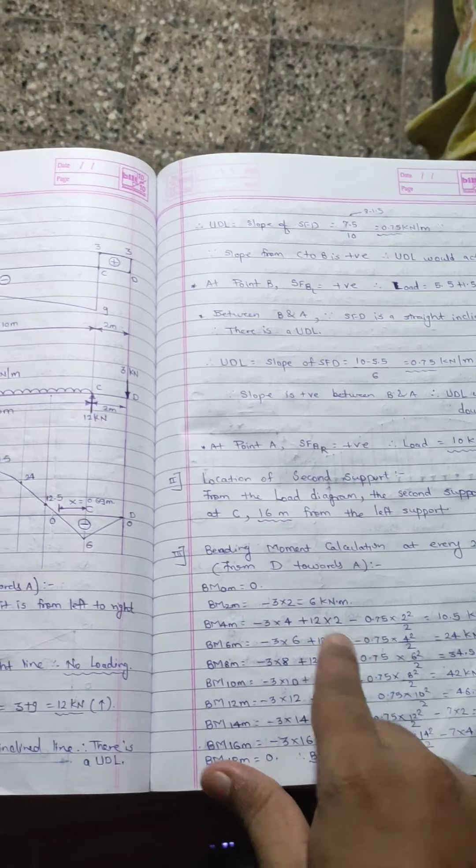Then again for UDL, after 2 meter it starts with 0.75 into 2 square upon 2, as because it's downward, so minus, so this is the value what you get. Then you have to just change this length, 6 meter, then 8 meters, 10 meters, 12 meters.

At 14 meter, bending moment at 14 meter, you will change this, but you have one more load, that is minus 7 into 2, which will be, this is 10 plus 2, 12, and after that you will get this again a load, so this is minus 7.

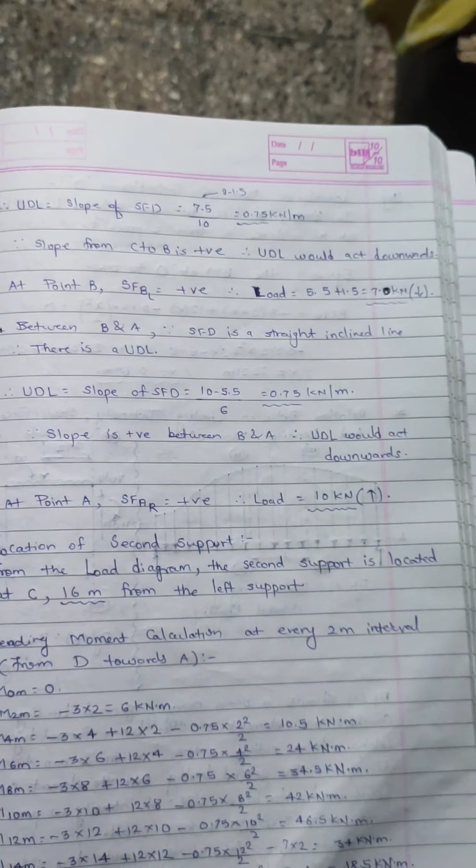See what is the value what we have got. So minus 7 into 2. We have this one more load also which we have written over here, that is shear force at B left is positive, it is 5.5 plus 1.5, that is 7 kilonewton.

As soon as you reach this point you have to consider this 7 also, so that is what we have considered over here, minus 7 into 2, and after that minus 7 into 4, and at 18 meter it will be 0. So out of this all, the maximum will be 46.5 kilonewton meter.

And then after getting all these moments, you have to draw this diagram also. So this is what about your diagram. Now remaining part is location of point of contraflexure.

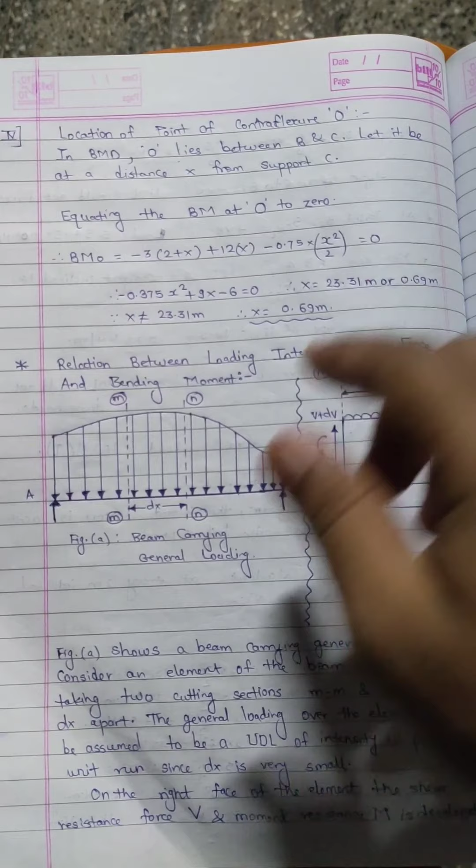So in BMD, O lies between B and C. Let's see, this is what the point of contraflexure we have got.

In BMD, O lies between B and C. Let it be at a distance x from support C. So this distance we have given as x. Now to find out, what we will do is we will take bending moment at O equal to whatever the value you will get, and we will equate it to 0.

So first of all we have minus 3 into 2 plus x. This is minus 3, as going it is clockwise, so right to left clockwise is negative, so minus 3 into 2 plus x. Then we have this load, that is plus 12 into x, and we have this UDL, that is minus 0.75 into x square by 2. So this is what we have, and we'll equate it to 0.

So we'll get two values of x, out of which we have to select proper value, that is 0.69 meters, and we will show it over here like this.

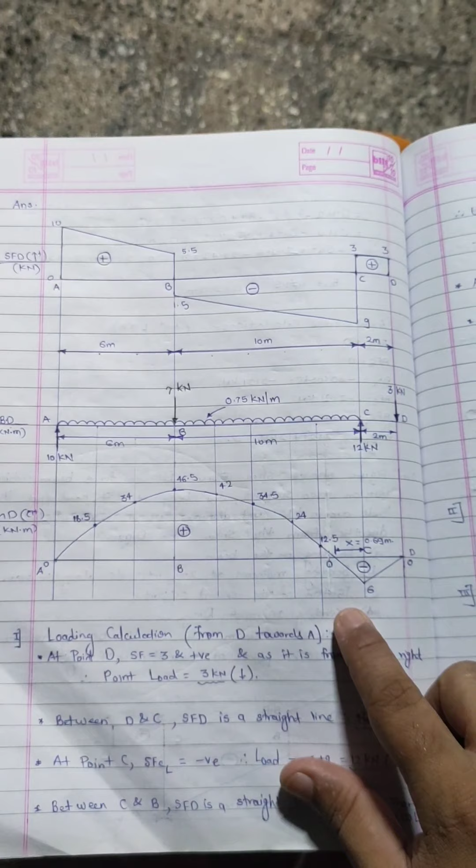Just have a look. Now the last topic from SFD BMD, which is frequently asked in exam and which is important also, is relation between loading intensity, shear force and bending moment.

So this is the kind of beam carrying general loading we have drawn. We have taken this section MMNN, distance is dx. Let's say this is A and B supports, and this is the kind of beam what we have, out of which we have selected this portion.

Let's say there is a UDL, this is W dx, as because this is dx. Then the shear force we will take V plus dV, and this is V. This moment we will take M plus dm, this is M, and this intensity is W, which is beam element of length dx. So figure A shows a beam carrying general loading.

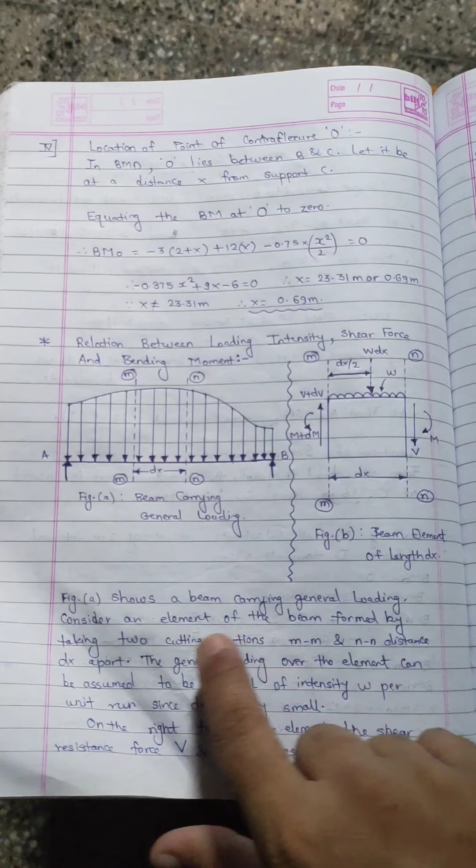Consider an element of the beam formed by taking two cutting sections mm and nn, these two, distance dx apart. This distance dx is just an assumption. The general loading over the element can be assumed to be a UDL of intensity W per unit run, since dx is very small.

On the right face of the element, the shear resistance V and moment resistance M is developed. Now on the left face, shear resistance force has increment of dV like this and becomes V plus dV, while the moment resistance M increases by dm and becomes M plus dm, like this.

Since the beam is in equilibrium, an element of the beam must also be in equilibrium. Applying the condition of equilibrium to the element, we take summation Fy equal to 0. Taking upward as positive, V plus dV is positive upward, minus V downward, minus W into dx for UDL equal to 0. We get dV equal to W dx, so dV by dx equal to W. We denote this as equation number 1.

Equation 1 implies that the rate of change of shear force at any section represents the rate of loading at that section.

Now taking summation of moment equal to 0, with clockwise positive: minus M plus dM, since it is anti-clockwise we take clockwise as positive, plus M, plus V dx taken clockwise at this point, plus W into dx square upon 2 equal to 0. After rearrangement we get minus dM plus V dx plus W into dx square by 2 equal to 0.

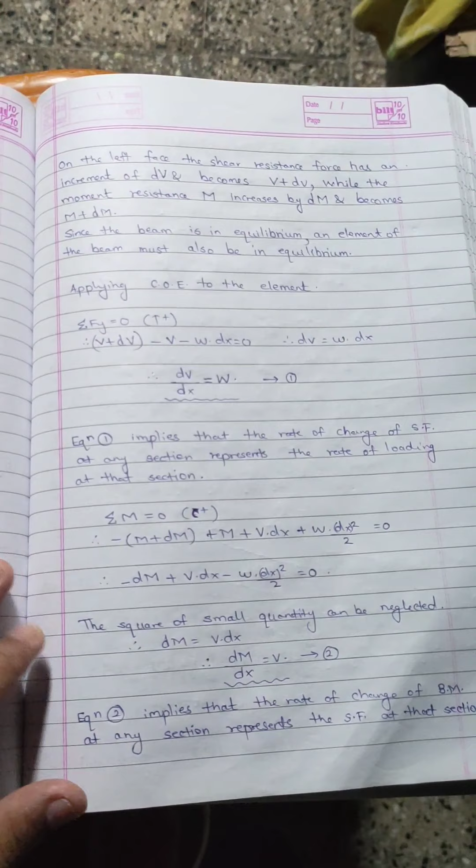Now after this we will start with the real life applications of this topic, SFD, BMD and AFD, that we are studying.

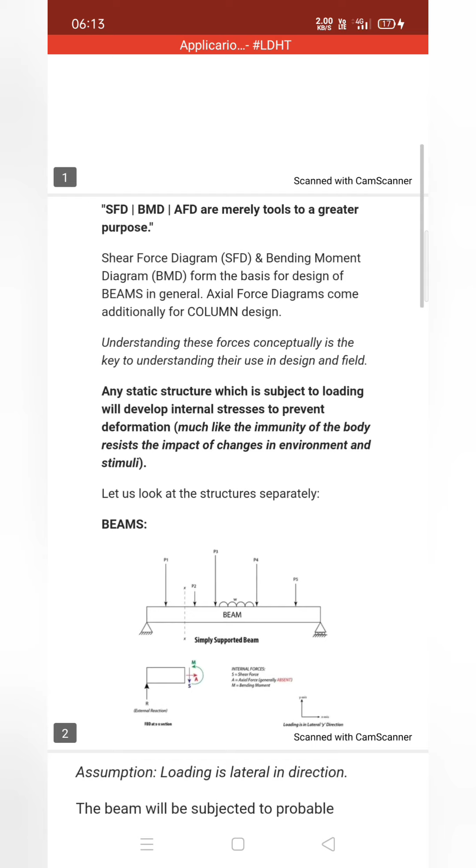Any static structure subjected to loading will develop internal stresses to prevent deformation, much like the immunity of the body resists the impact of changes in environment and stimuli. Let us look at the structures separately.

First, consider this beam. It is simply supported, one end hinged, other end roller, with loads P1, P2, P3, P4, and P5. Between P3 and P4 there is a UDL of intensity W. This is the beam. We have taken a section XX between loads P1 and P2.

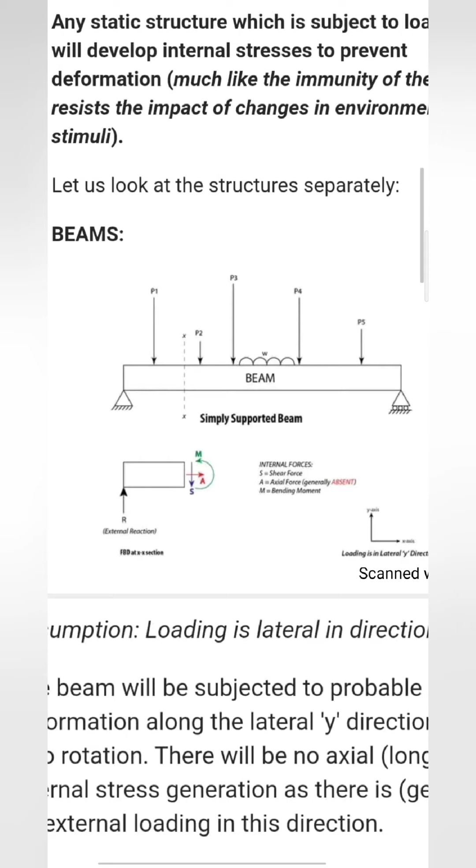This is the FBD at section XX. Let me zoom it. At section XX we get this FBD: there will be a downward load, S shear force, A axial force generally absent, and a moment M, bending moment. This shows loading is in the lateral y direction, with this as the y axis and this as the x axis.

Assumption: loading is lateral in direction. The beam will be subjected to probable deformation along the lateral y direction and also rotation. There will be no axial, that is longitudinal, internal stress generation, as there is generally no external loading in this direction.

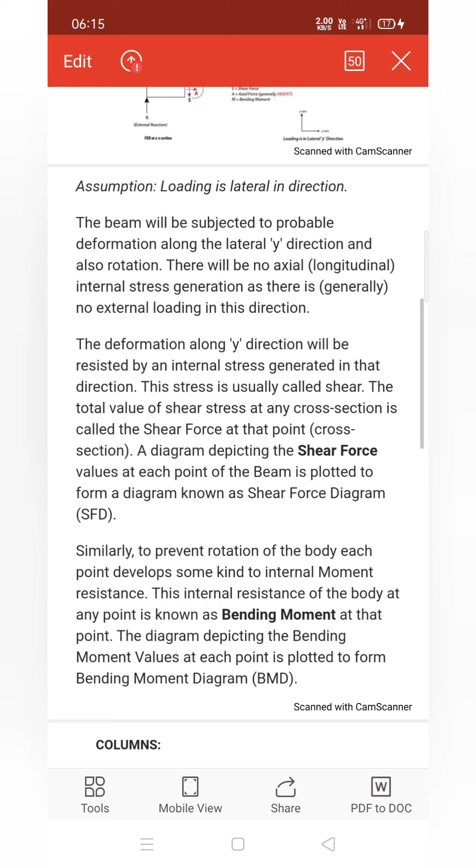Now the deformation along the y direction will be resisted by an internal stress generated in that direction. This stress is usually called shear. The total value of shear stress at any cross section is called the shear force at that cross section. A diagram depicting the shear force values at each point of the beam is plotted to form a diagram known as the shear force diagram, denoted as SFD.

Similarly, to prevent rotation of the body, each point develops some kind of internal moment resistance. This internal resistance of the body at any point is known as the bending moment at that point. The diagram depicting the bending moment values at each point is plotted to form the bending moment diagram, that is BMD.

Now, when we talk about columns, the above two internal forces may be generated. However, the primary form of loading in columns is in an axial, that is longitudinal, direction. As such, the internal stress generated will be axial in nature, known as axial stress. The total value of axial stress at any cross section is called the axial force at that cross section. The diagram plotted for each point along the length is known as the axial force diagram, that is AFD.

Now, use of these diagrams. Every structure will try to resist deformation by developing the above internal resistance, that is shear, moment and or bending moment. However, the properties of the body will decide how much resistance would be provided against loading.

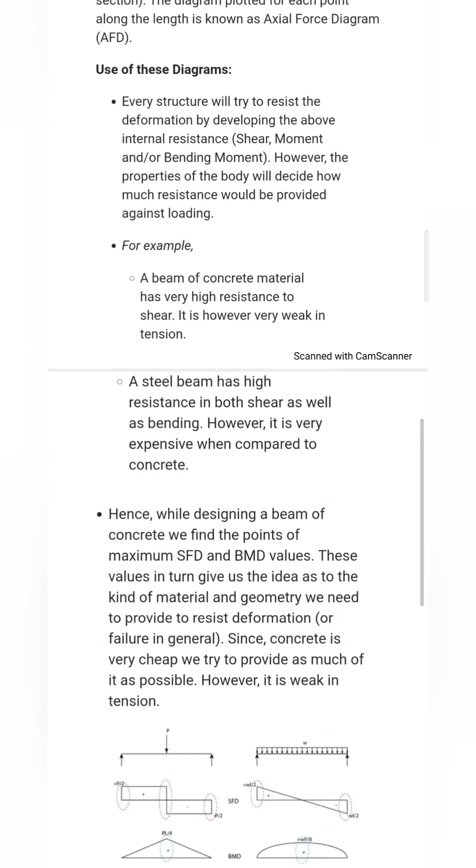For example, a beam of concrete material has very high resistance to shear. It is, however, very weak in tension. A steel beam has high resistance in both shear as well as bending, however it is very expensive when compared to concrete.

Hence, while designing a beam of concrete, we find the points of maximum SFD and BMD values. These values give us an idea as to the kind of material and geometry we need to provide to resist deformation or failure in general. Since concrete is very cheap, we try to provide as much of it as possible, however it is weak in tension.

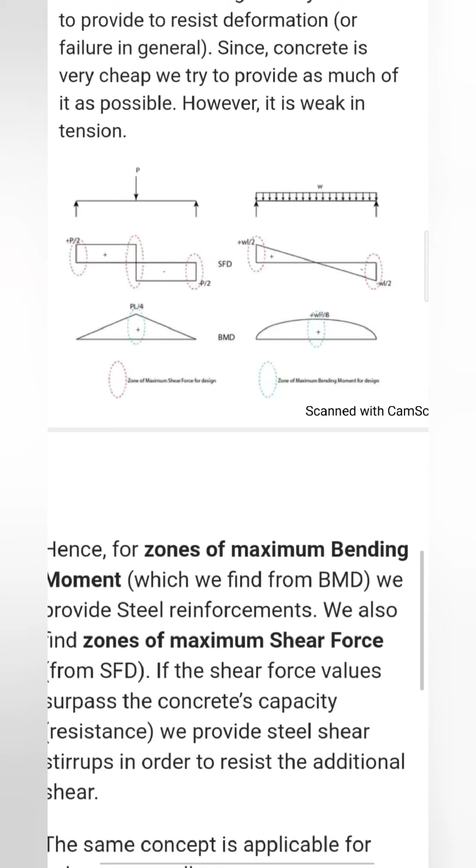So you can just note down this diagram. This is the kind of diagram, and these are all the zones of maximum shear force for design, and these are the maximum bending moment zones for design. Okay, these are the kind of diagrams.

Now zoom out. Hence, for zones of maximum bending moment which we find from BMD, we provide steel reinforcements. We also find zones of maximum shear force from SFD. If the shear force values surpass the concrete's capacity resistance, we provide steel shear stirrups in order to resist the additional shear.

Same concept is applicable for columns as well. As you can see, SFD, BMD, AFD are merely tools to a greater purpose. The values from these diagrams help us decide the material and geometry of the design elements.

Now, shear force and bending moment diagrams are the next consecutive steps after a loading diagram. SFD helps you understand the shear forces, and BMD helps you understand the bending moments on a structure. Now, what are the exact applications?

While working on complex structures where civil engineering thumb rules and basic considerations of depth and span from the experience of civil engineers do not work well, you need to double check for failure and safe structure. Then these basic rules come to your help.

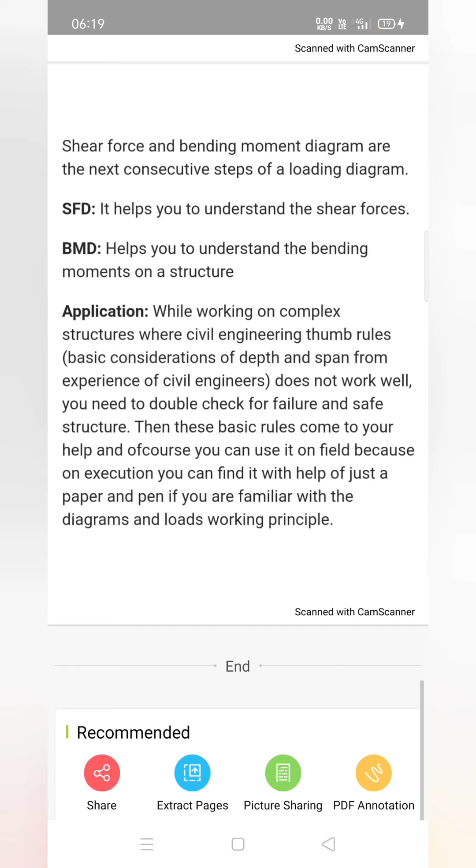Of course, you can use it on field, because on execution, that is exactly what we are going to do, you can find it with the help of just a paper and pen if you are familiar with the diagrams and loads working principle. So this is all about real life uses or exact application of shear force diagram SFD, bending moment diagram BMD, and axial force diagram AFD.